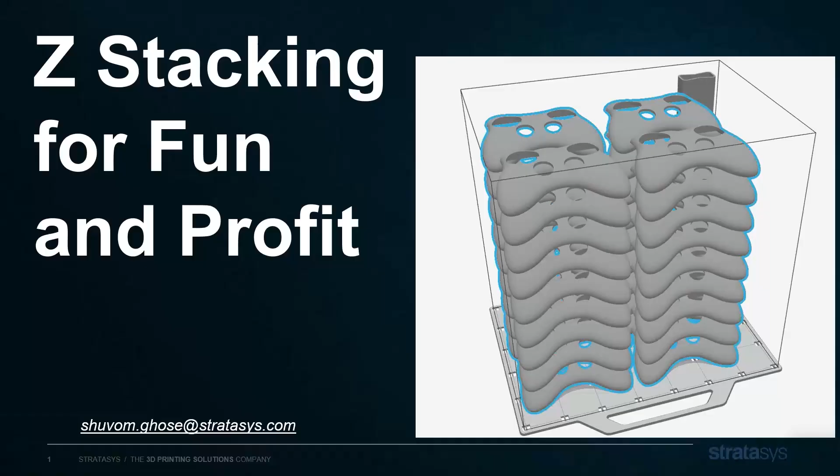Hello, this is Shuvom Ghose from Stratasys Software, and let's talk about stacking your parts in Z for FDM. We're talking about finally using this part of your FDM tray. You could always do this in powder bed, so what we're really talking about is just taking that powder bed idea and moving it to FDM.

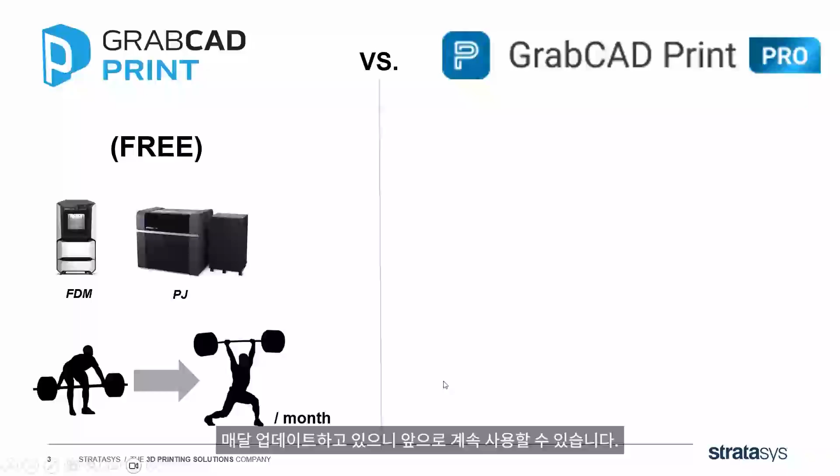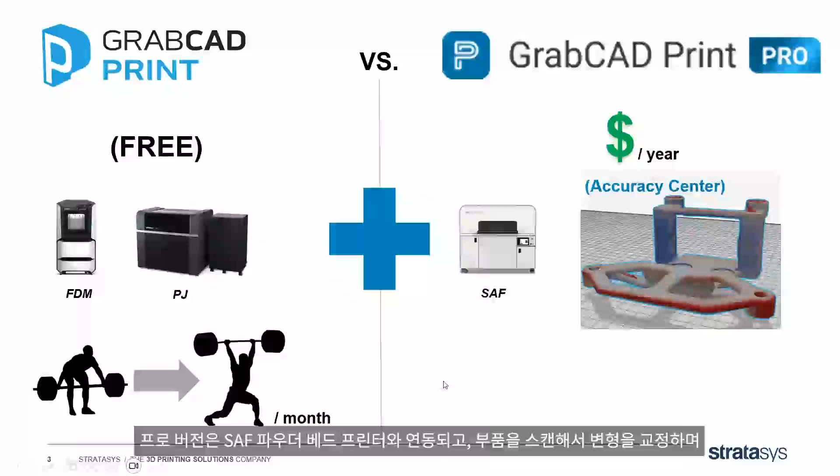Just as a reminder, there are two versions of GrabCAD Print now. GrabCAD Print Basic is free. It talks to your FDM and PolyJet printers, and we're still improving it from month to month. That's not going anywhere. What we're talking about today is adding to it with GrabCAD Print Pro. That's going to be a yearly charge per user. It talks to your SAF powder bed printers. It scans your parts and corrects for warpage, and also does a couple other things. And we're talking about 3D array or Z stacking today.

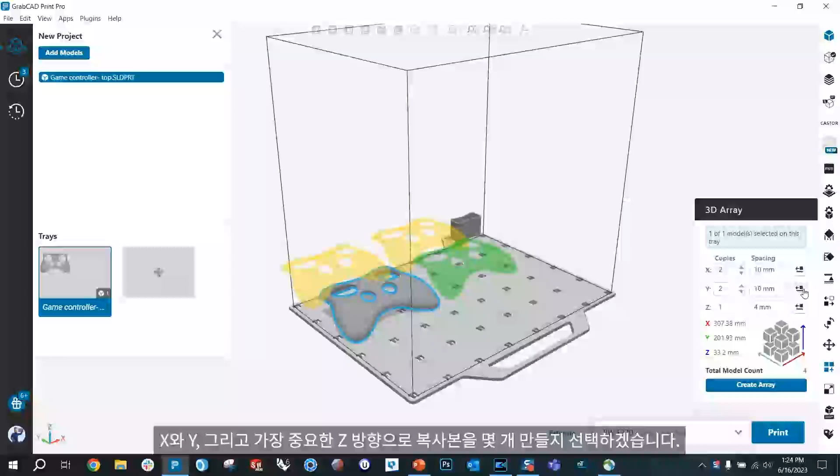All right, so I've got a single part here on the tray, just a single part file. We're going to go down to the lower right, this new button, the 3D array button. And we're going to choose how many copies we want in the X direction, in the Y, and most importantly, in the Z. Okay, we just keep adding them up. It shows us we're going to have 32 total copies, and we hit create.

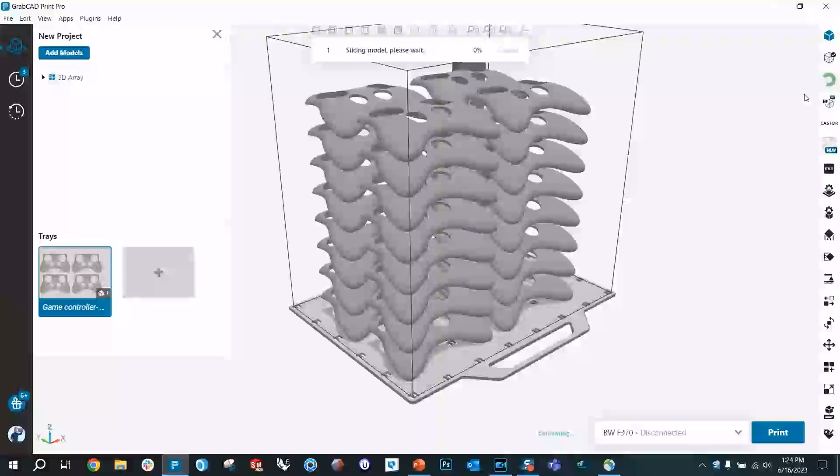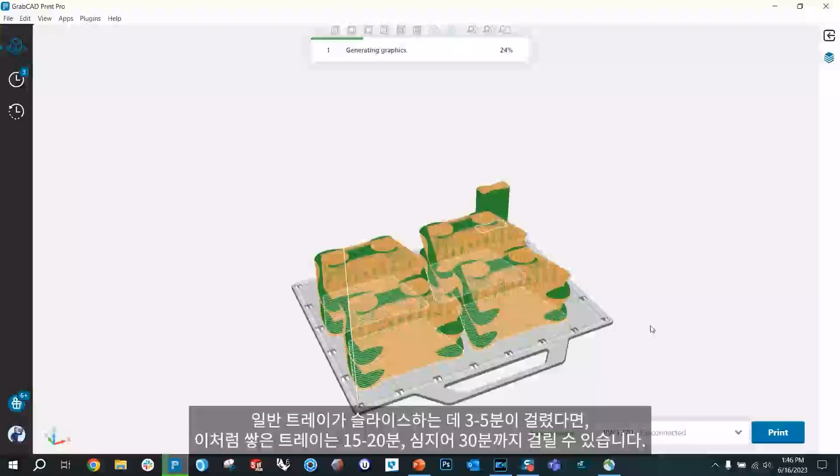And it's done. What it does is make one object in the feature tree for us to manipulate. But that's the easy part. The hard part is when I go over here and I hit slice. So it's obvious our slicer is working a little harder, right? Instead of just one layer of parts, now it has to figure out how the second layer supports attached to the first layer, how the third layer supports attached to the second layer, almost like you're stacking them in a resin printer, right? So if your normal tray takes 3 to 5 minutes to slice, be prepared for this kind of stack tray to take 15, 20, 30 minutes to slice.

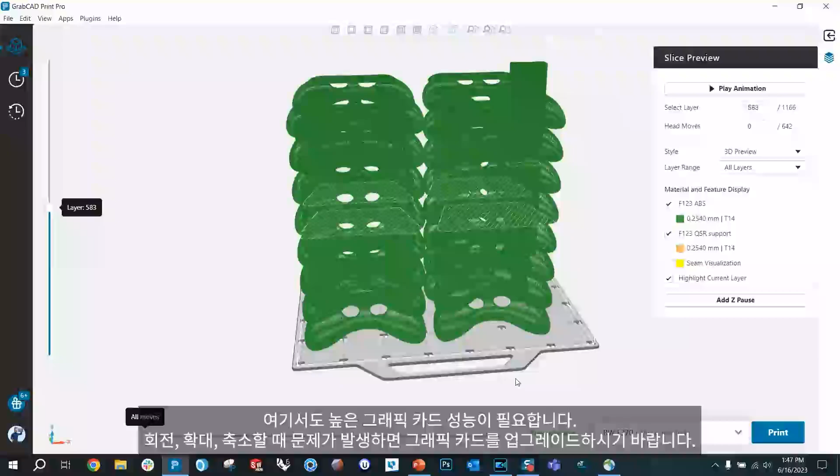You also may run out of RAM on your machine. Even on a powerful machine, this is very RAM intensive. So if you crash halfway through, just watch out for that. It's RAM and time intensive. But we got through it. And there's the finished tray, ready to print. This part is very graphics card intensive, so if you have trouble rotating or zooming in and out, consider upgrading your graphics card. But this is only half the story.

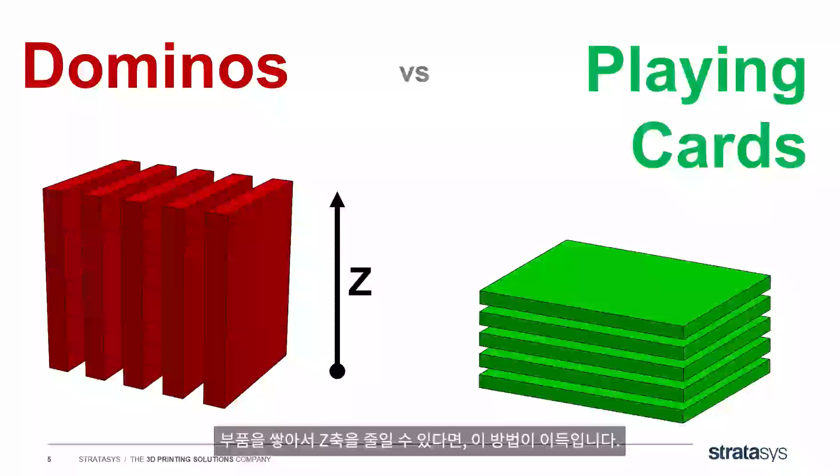Now the question is, when would you want to do this? When would you want to Z-stack your prints? It comes down to a concept I call dominoes versus playing cards. Typically in FDM printing, you're paying more for the Z direction than you are for the X and Y. So if you have to put a certain number on the tray, let's say you have to print 5 of these parts, and you can reduce some of the Z by stacking them on top of each other, then it's worth doing. Notice in the playing card example, I even made the parts thinner, so the Z difference is more. So they typically work better on long, flat, thin parts.

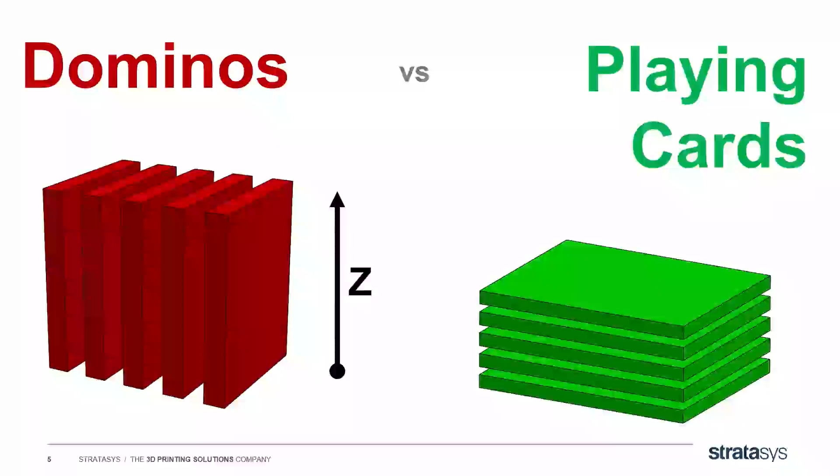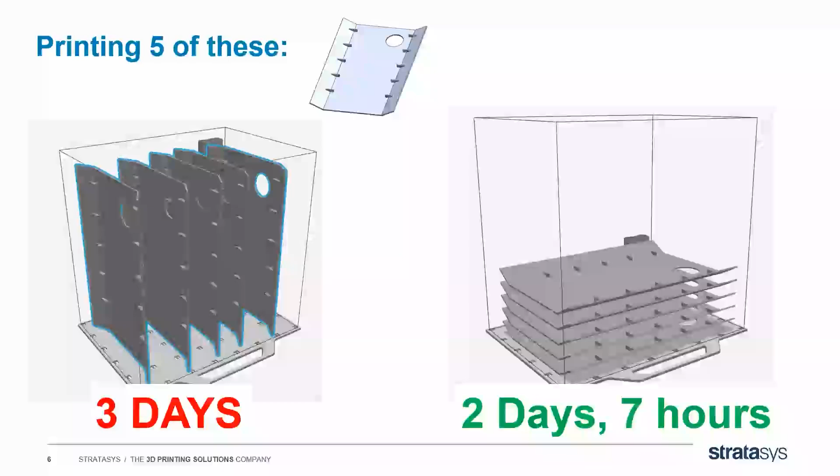So if you're going to print 5 of these, you can put them vertically and take 3 days, or you can stack them in Z and save 17 hours off your print. You're going to use more support, but the time difference just might be worth it. Alright, that's been the 3D Array Z stacking portion of GrabCAD Print Pro.